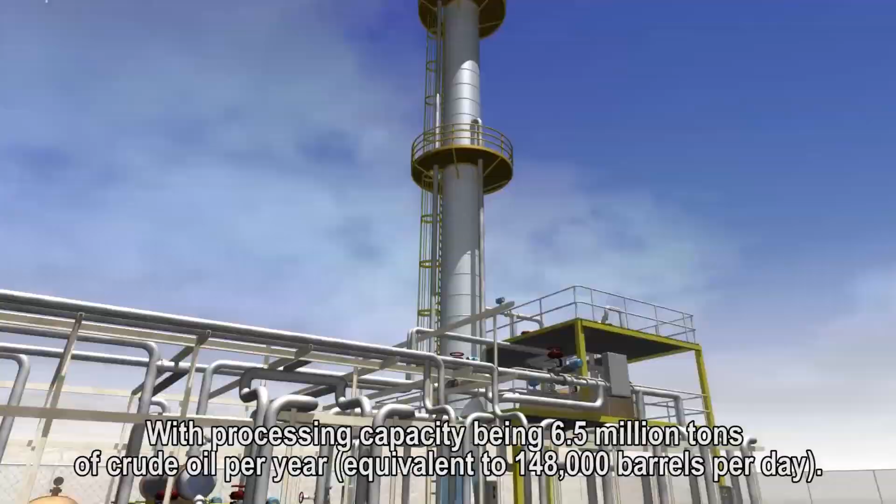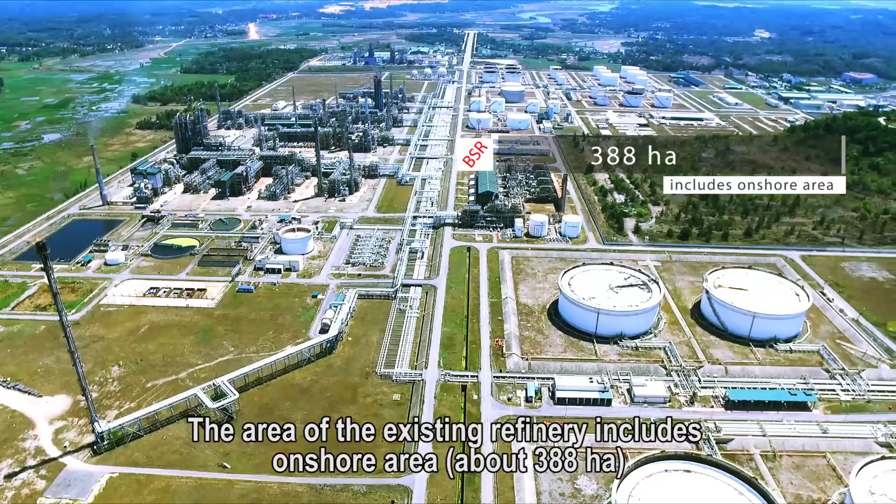The project has an investment of $3 billion USD, with processing capacity being 6.5 million tons of crude oil per year, equivalent to 148,000 barrels per day. In the future, the plant will be expanded to 8.5 million tons of crude oil per year. The area of the existing refinery includes onshore area, about 388 hectares, and offshore, about 471 hectares.

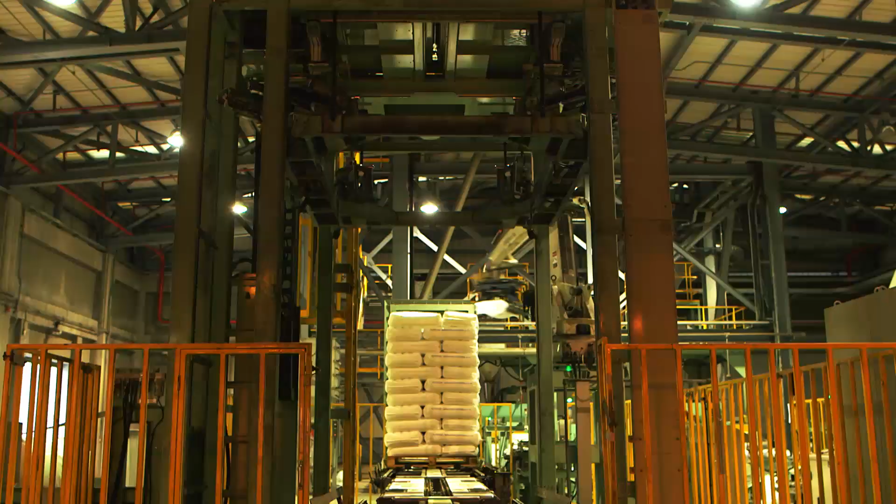The main products of the refinery are A92 and A95 gasoline, automotive diesel oil, FO oil, kerosene, Jet A1 fuel, LPG liquefied gas, propylene, and polypropylene.

Environmental protection is not only one of the top priorities of Binh Son Petrochemical Company, but is also an important factor contributing to the sustainable development of BSR and the community.

Binh Son Refining and Petrochemical Joint Stock Company is under the direction of Vietnam Oil and Gas Group. We are always aware of the importance of environmental protection. We have set up a management system and operating procedures to strictly comply with all regulations on environmental protection.

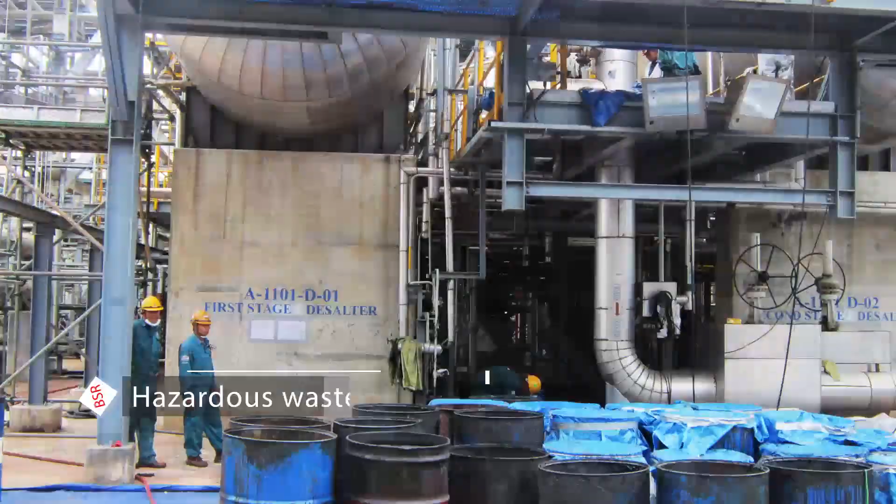In the operation of the plant, the main sources of pollution include gas emission, the generation of industrial wastewater, solid waste, and hazardous waste. In order to effectively control all the environmental aspects relative to BSR operation and business, the international standard ISO 14001 for environmental management system has been applied in BSR.

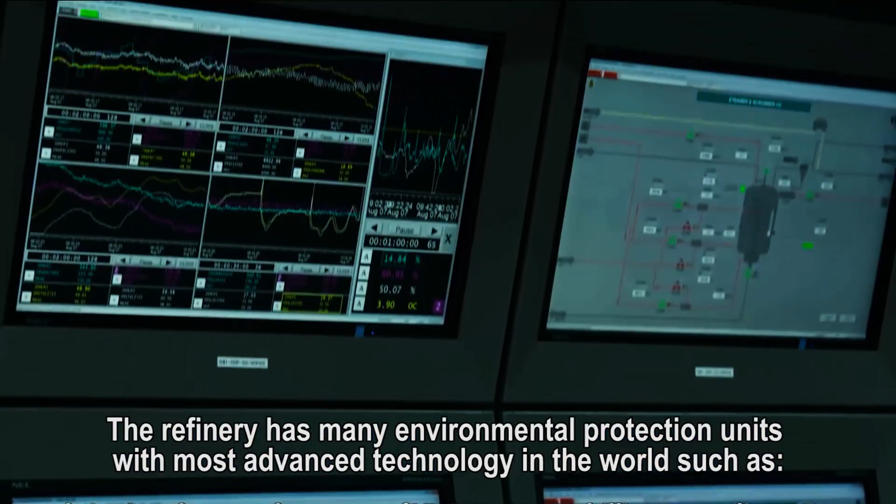The refinery has many environmental protection units with the most advanced technology in the world, such as the Effluent Treatment Plant, ETP, Unit 58; the Electrostatic Precipitation, ESP, for removing fine particles or dust in emission gas in the RFCC unit; and the Tail Gas Treatment and Sulfur Recovery, SRU unit.

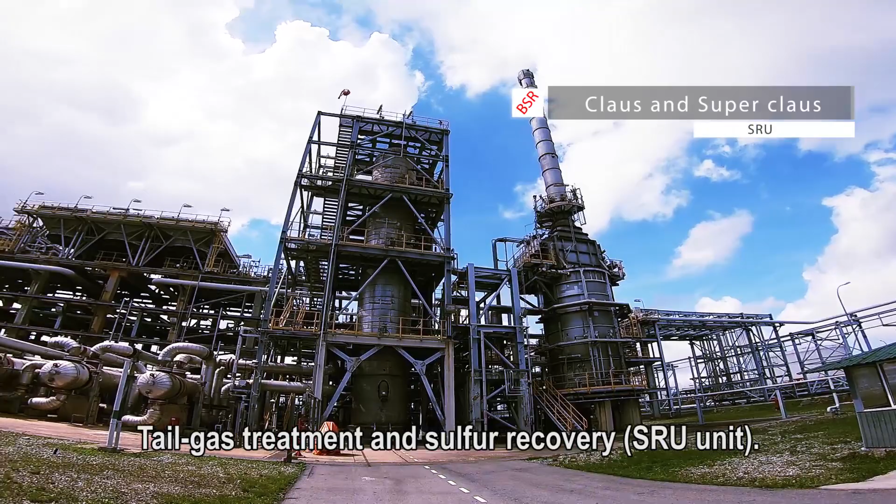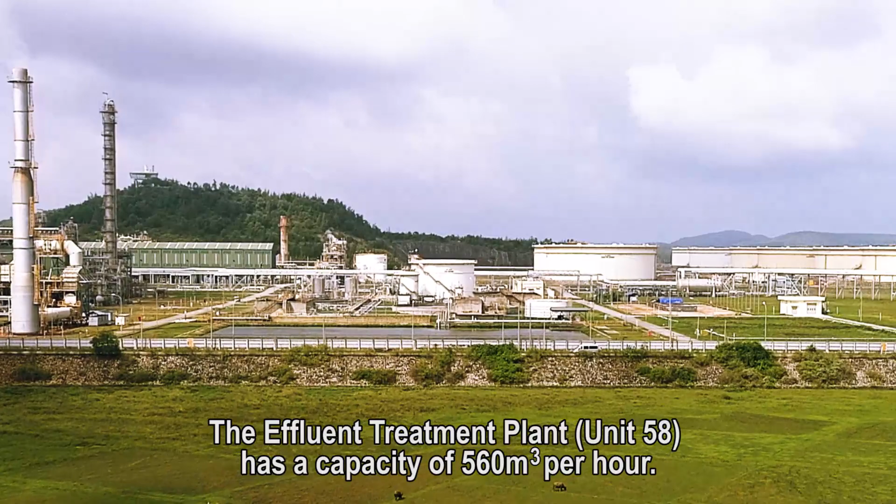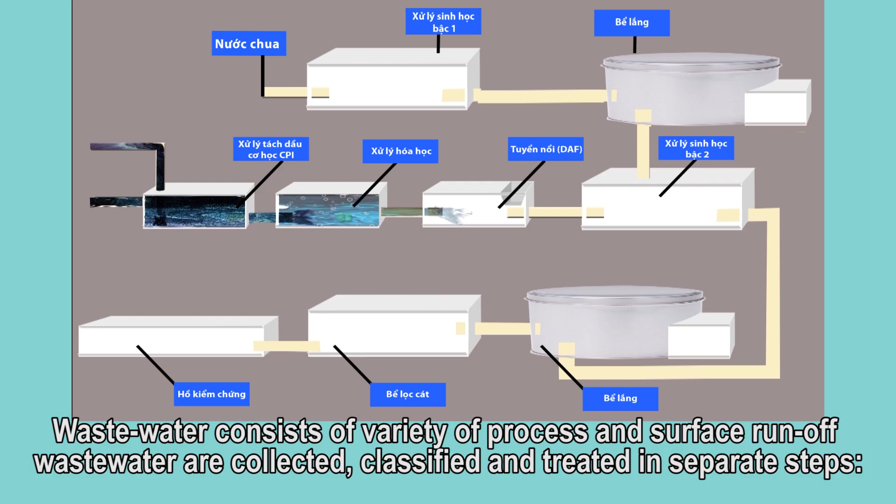Wastewater Treatment System: The Effluent Treatment Plant, Unit 58, has a capacity of 560 cubic meters per hour. Wastewater consisting of a variety of processes, and surface runoff wastewater, are collected, classified, and treated in separate steps. For oily water, firstly, free oil is separated from the wastewater by corrugated plate interceptors, CPI.

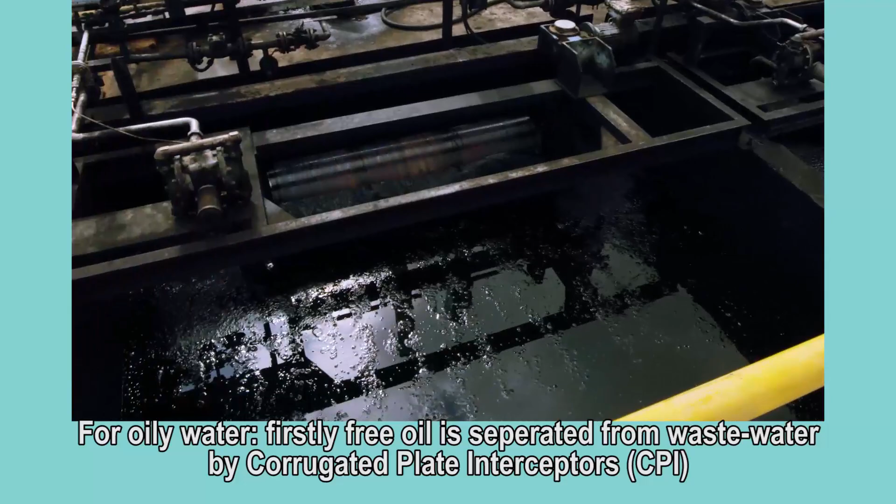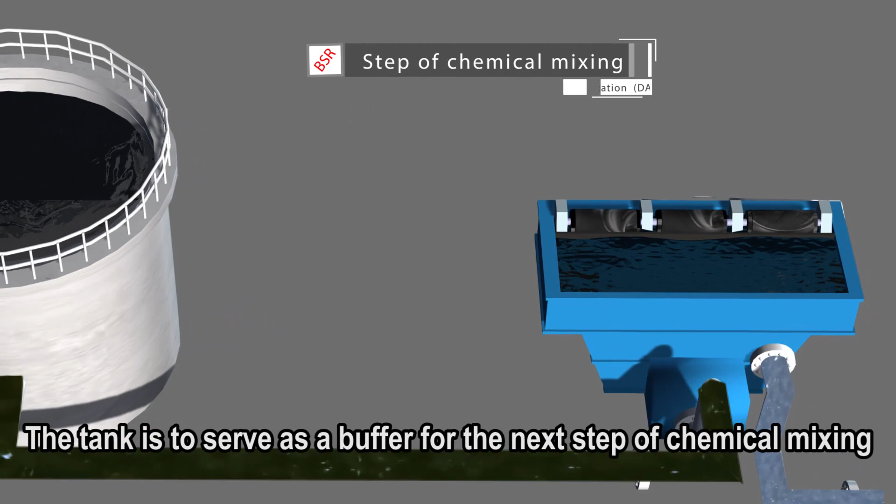After CPI, the effluent will be pumped into the balancing tank, TK5804. The tank serves as a buffer for the next step of chemical mixing and dissolved air flotation, DAF, to separate the emulsified fine oil and the majority of the remaining TSS from the effluent.

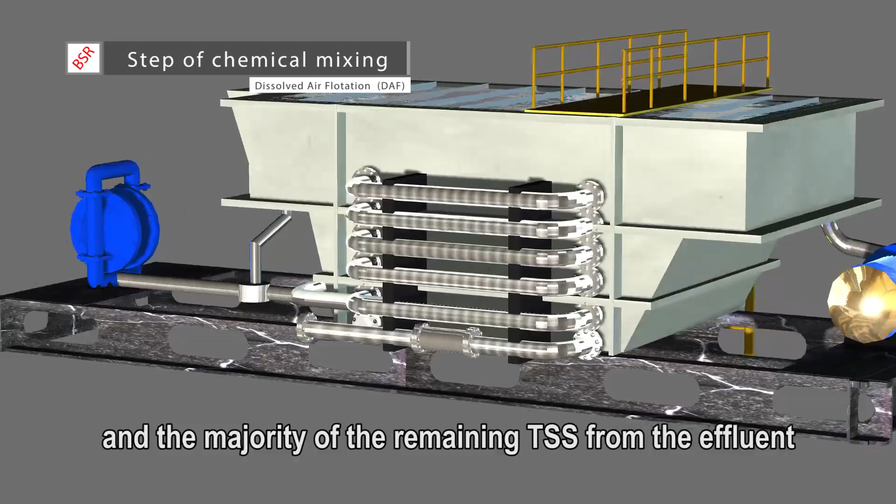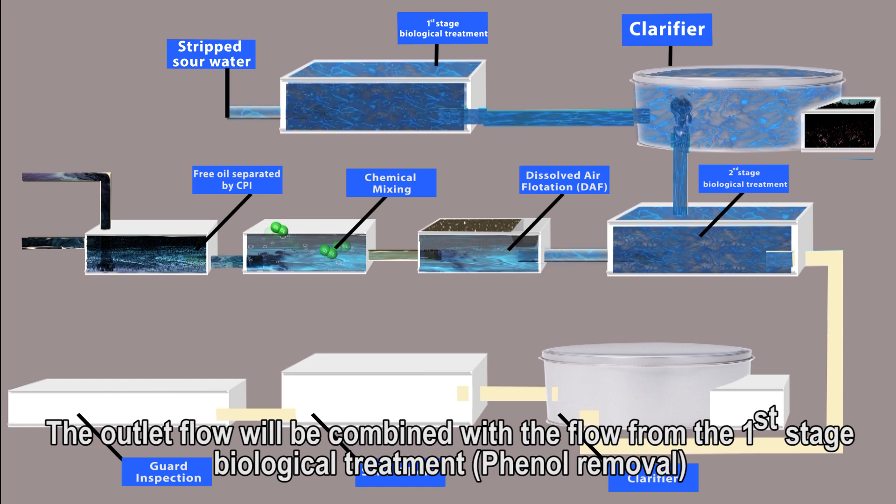After being treated in the DAF, the outlet flow will be combined with a flow from the first stage biological treatment, phenol removal, then flows to the second stage biological treatment. In this step, most of the COD and the BOD is eliminated by biodegradation.

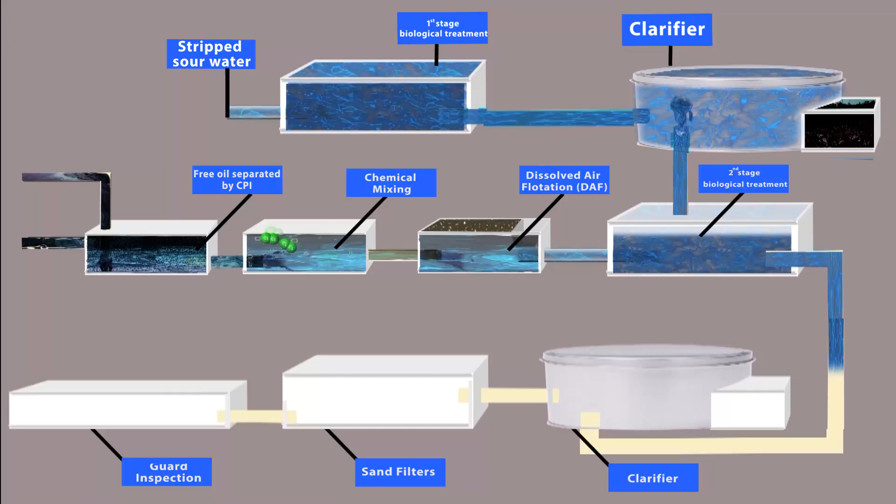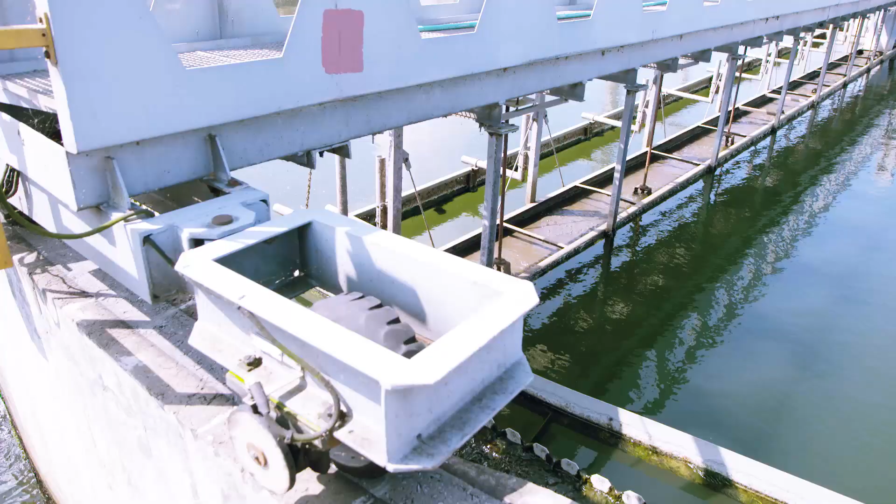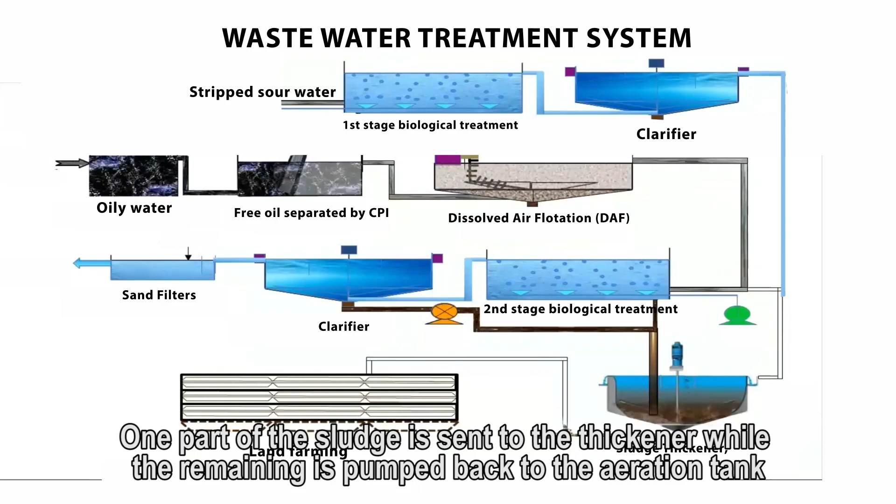The mixed solution from the second stage biological treatment is sent to the clarifier where sludge separation takes place. One part of the sludge is sent to the thickener, while the remaining is pumped back to the aeration tank. Sludge is finally pumped to land farming.

The treated effluent from the clarifier is then sent to the sand filter basin in order to remove the remaining TSS after the biological treatment. The final treated water will be sent to the guard basin for inspection and eliminating the last bacteria contained in the effluent before being discharged into the sea. Inside the basin, the parameters of COD, TSS, oil, pH, temperature, and flow rate are monitored by an online system.

Gas emission. The typical pollutants in emission of refinery are dust and sulfur compounds.

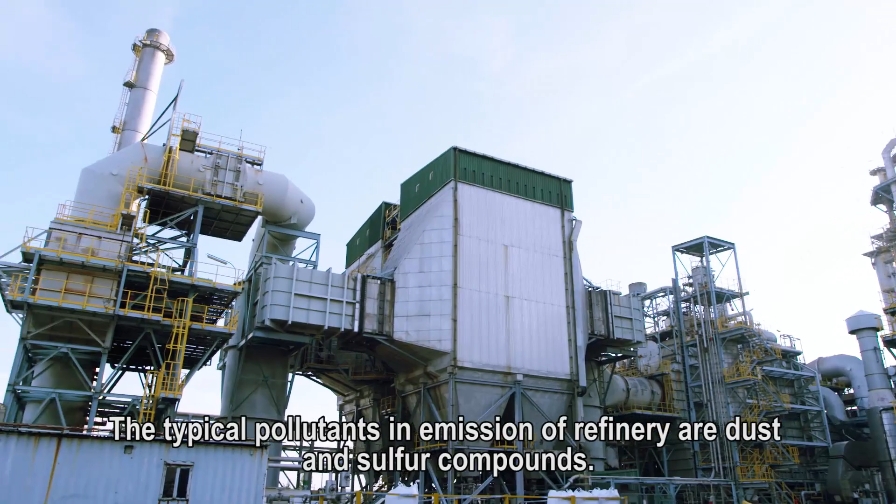The flue gas coming from the catalytic regeneration CO boiler of the RFCC unit is sent to the electrostatic precipitator, ESP, for removal of fine particles before emission via stack. Dust content in gas emissions meets the National Technical Regulation on Emission of Refining and Petrochemical Industry.

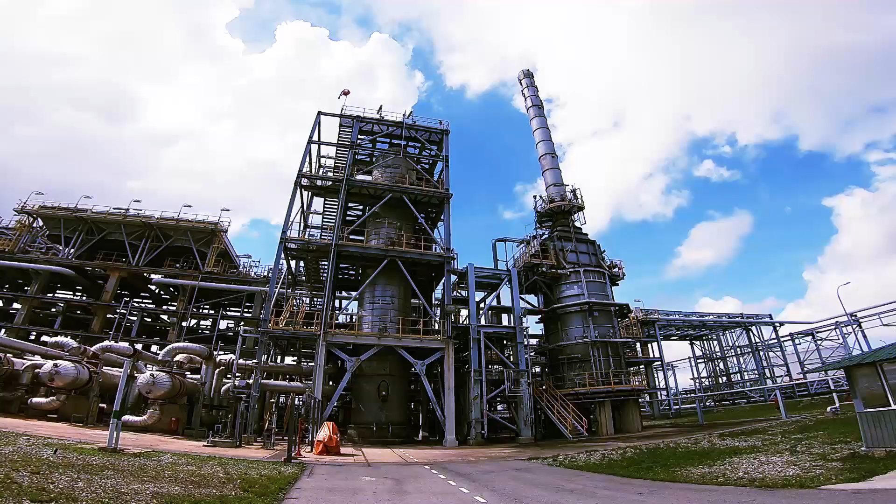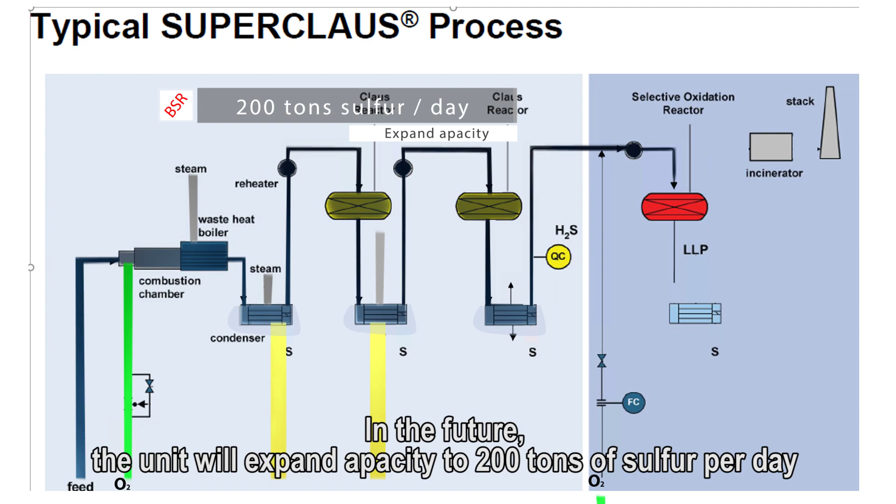The off gas with high content of sulfur compounds, acid gas, will be sent to the Sulfur Recovery Unit, SRU, for converting all sulfur compounds present in the acid gas feeds into elemental sulfur. The current SRU capacity is 18 tons of sulfur per day. In the future, the unit will expand to a capacity of 200 tons of sulfur per day. The recovered sulfur is also a commercial product of BSR.

The final treated gas is emitted via the refinery's stacks. The height of all stacks is designed based on gas emission models to ensure the gas diffusion and meet National Technical Regulation on Emission of Refining and Petrochemical Industry.

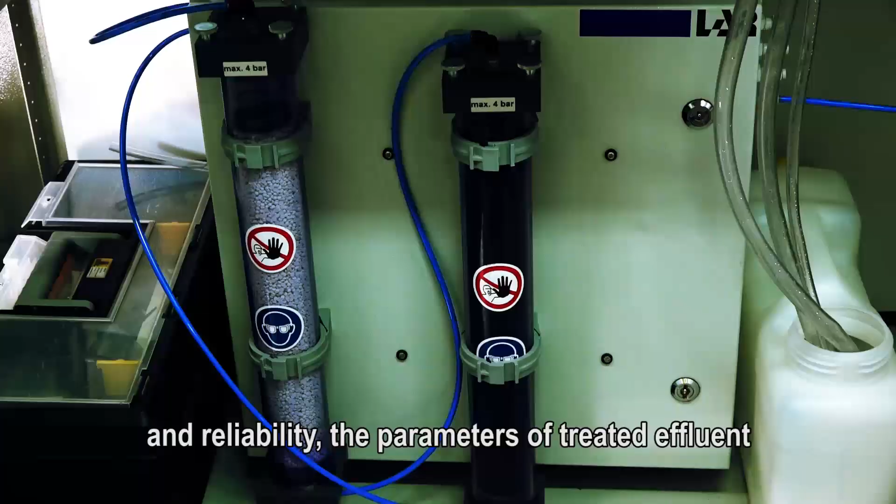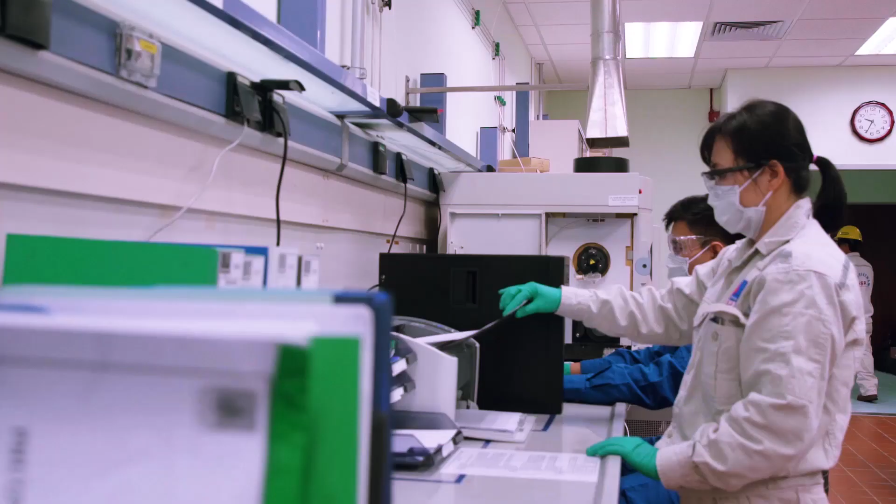In order to ensure all the environmental protection units are effectively operated and reliable, the parameters of treated effluent emission are monitored by online monitoring system as well as daily analyzed by BSR's laboratory. All data from online monitoring shall be continuously sent to the Department of Natural Resources and Environment of Quang Ngai.

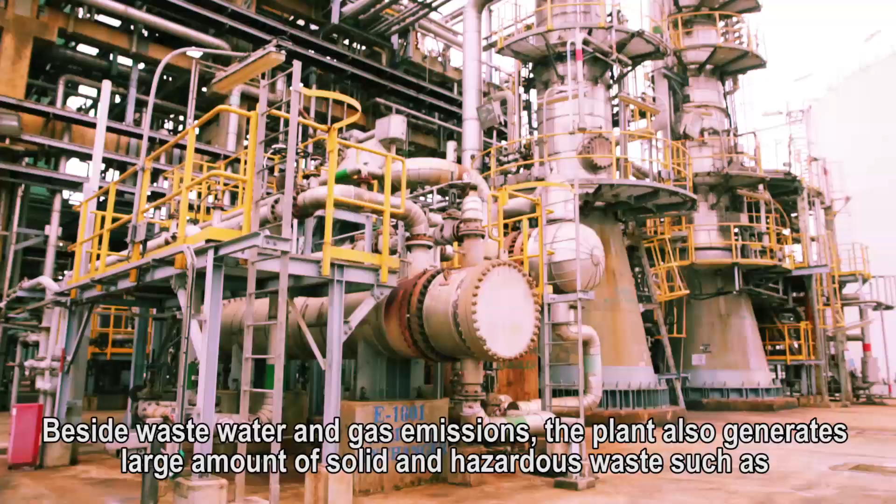Solid waste and hazardous waste. Besides wastewater and gas emission, the plant also generates large amount of solid and hazardous waste such as industrial waste, used catalysts, chemicals, activated carbon, absorbents, oil-contaminated materials, sludge, and other waste.

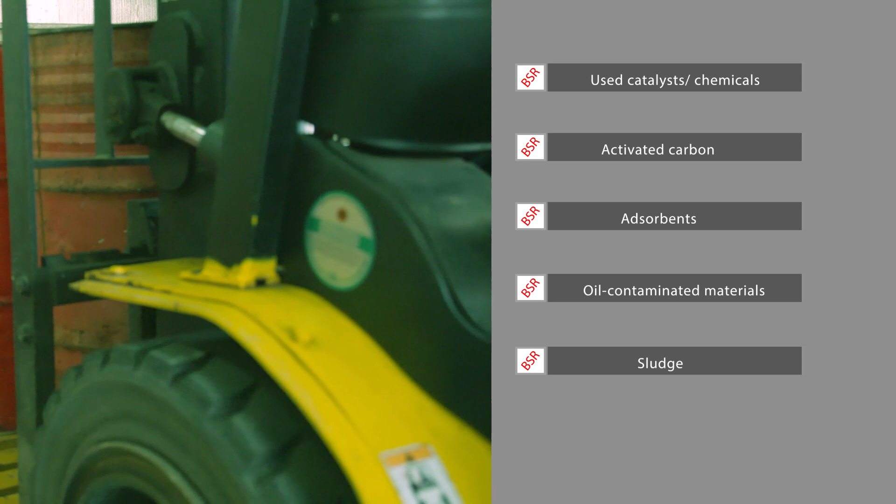All the generated wastes are properly controlled, classified at sources such as recycled waste, non-recycled waste, hazardous waste, then temporarily handled in the designated waste storages inside the plant. These storages meet the requirements for temporary waste storage.

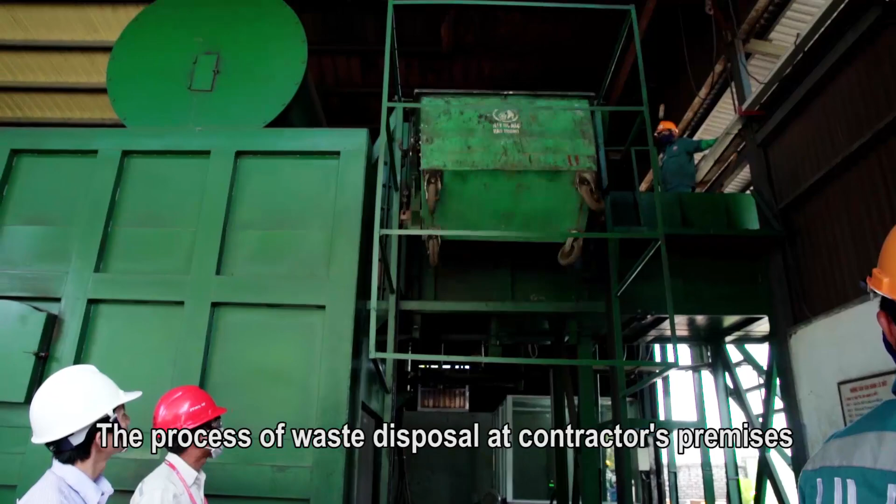The classified waste will then be transferred to licensed and contracted contractor for transportation and disposal. The process of waste disposal at a contractor's premise is also regularly audited by BSR supervisors to ensure it is properly handling and disposal following the contract requirements and regulations.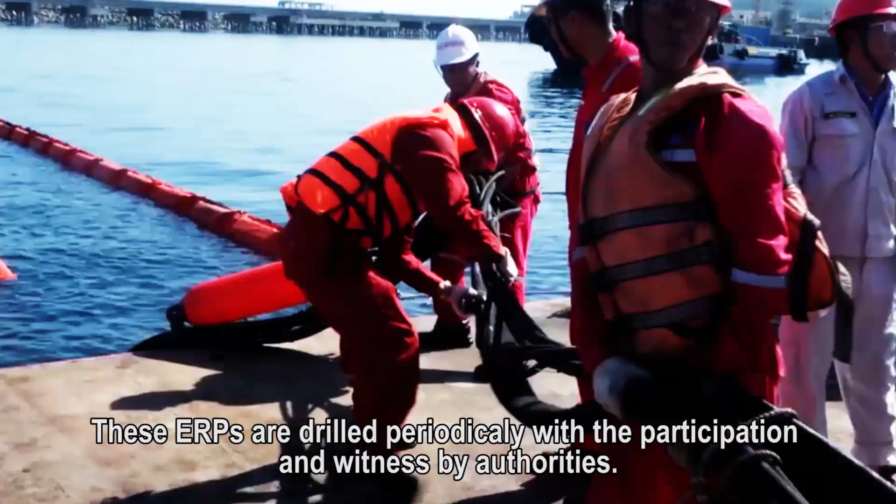The BSR's emergency response plans, ERPs, are appraised and approved by authorized agencies. These ERPs are drilled periodically with the participation and witness by authorities.

Environmental protection dissemination and training. All company and contractors working personnel in BSR are trained on health, safety, and environment, HSE, prior to start their work in BSR.

In addition, in order to raise awareness of the environmental protection for personnel of BSR, contractors, and the community, BSR regularly organizes activities on environmental protection at the workplace and residential area around the refinery. The environmental protection is always concerned by BSR's leaders and committed to continuous improvement.

BSR complies with the provisions of the law on environmental protection. In their operation and business, BSR is always proactive in learning, performing, and complying with regulations.

BSR has many compliments on environmental protection performance by the authorities as well as the leaders of Quang Ngai and government. BSR has been awarded many environmental protection awards, including certificates of merit certified by the chairman of the People's Committee. BSR is one of the best companies on environmental protection compliance, not only in the area of Dung Quat Economic Zone, but also in the Quang Ngai province.